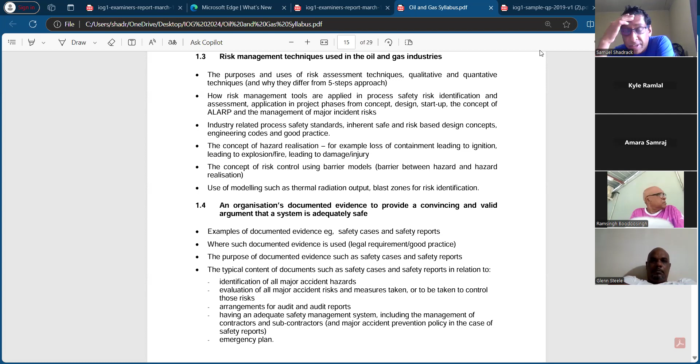What I had mentioned was that I think it was a bit short. Like those who did it, the writing style was a bit short. The verb they use for these exams, for the written exam, the most common verb is 'outline'. And outline carries with it about three sentences, maybe two or three, three to four lines. So if you write a point, even if they asked you to identify the root cause of the accident, and you say the root cause of the accident is management failure - that's just one line. So for many of us here who are open book students, you all did the exam in the open book era anyway, which is still going on.

But you might wonder, well, what else do you say? Because you don't have a case study, right? Remember, with these exams, it's just a flush question. So what else do you say? The answer is you can make up an example. You can probably just say 'for example', and that gives you the additional line. For example, if management failure is not identified and corrected, you can give an example - you can say managers may have the opinion that the accident is the fault of the worker. You make something up because the one line is not going to give you the mark anyway.

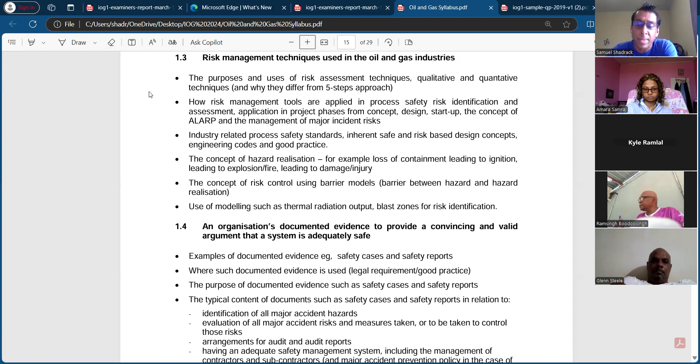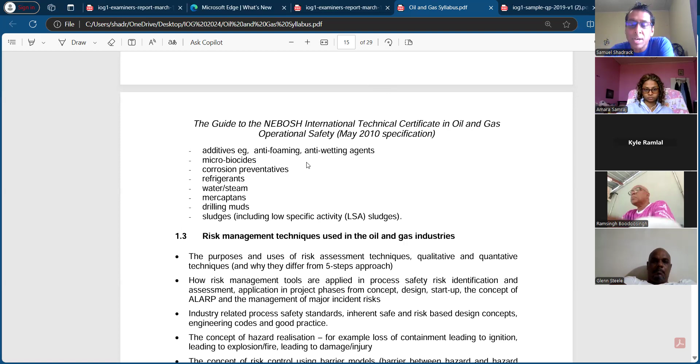So today we are on to 1.3. Again, I would want to congratulate all those who did the process safety course. I have some of you all here, and I think we got 89%, well, 90% passes. Two students did not pass the process safety, but the reason I'm mentioning it is because there are some common elements. And if you look at the syllabus, as I was telling you last week, you see process safety up there - process safety leadership.

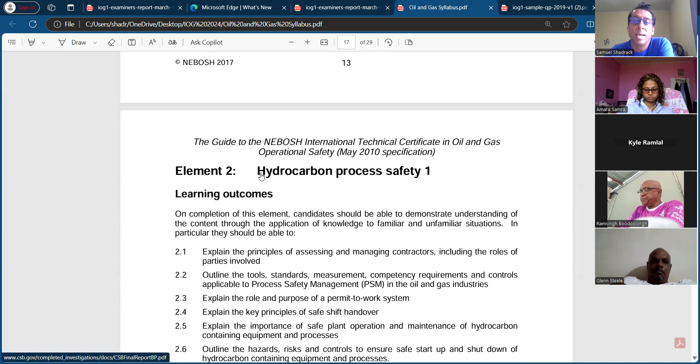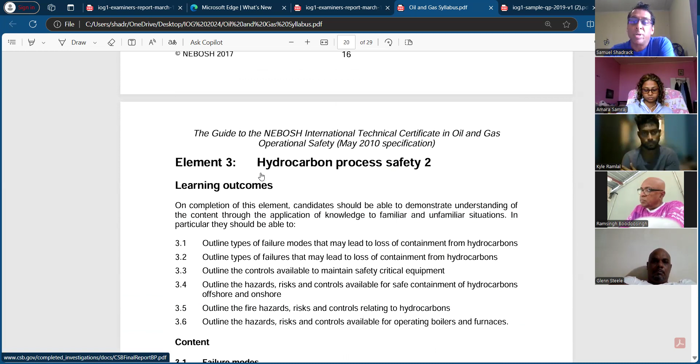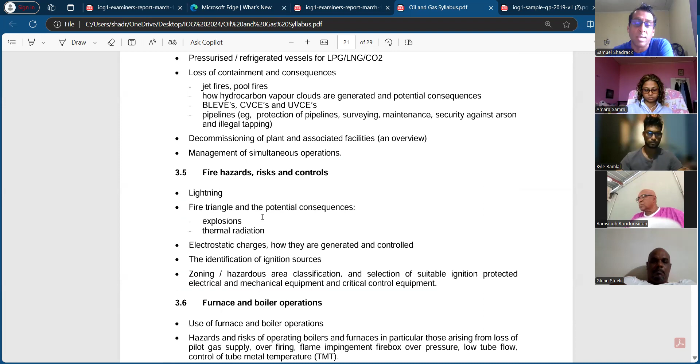So those who did the process safety course, it would have been a nice follow-up. Ideally, process safety was level 4 and oil and gas is level 5, so you see hydrocarbon process safety. Those who did the process course - if you didn't, we'll take it from scratch again - you would have seen things like BLEVEs and CVCEs and UVCEs, and even today's class. Today, to me, the whole class is like a process safety lesson. So that's good, and those who did that course would have had a little foundation going on.

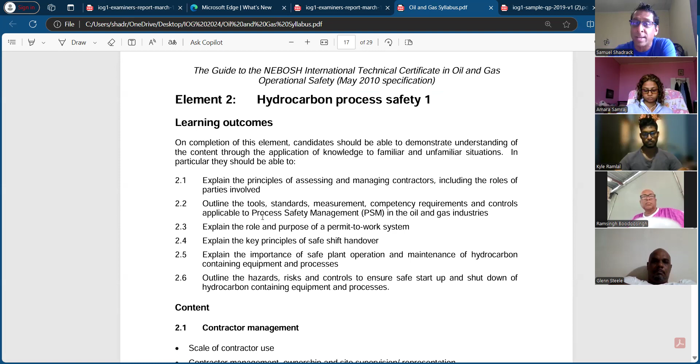Not to put down the process safety, but remember, process safety is multiple choice, so in a way it didn't have to really work - you had to study, but the answer was there, right there. It had to be one of the four answers because it's multiple choice. But oil and gas is level 5. It's some of the same thing, of course there's some more when it comes to oil and gas. But the lesson today, 1.3, is on risk management techniques, and that doesn't change - it doesn't even change for the degree.

So 1.3, I don't know if we're going to get into 1.4. I didn't plan to get into 1.4. The reason is that, unlike process safety, like if I'm teaching HAZOP, I have to make sure you all understand it because next thing they give you, you all want to do it.

Process safety, we'll just assume - well, we didn't assume, but we kind of just said you just had to know it as a multiple choice. You're not really required to produce or replicate a HAZOP or a bow tie. But in this course, you probably will have to because it's a written exam, right?

So just to read it out here, I'm going to touch a couple of them. Risk management techniques used in the oil and gas industries, the purpose and uses of risk assessment techniques, qualitative and quantitative techniques, and why they differ from the five-step approach. We will talk about that as well, right?

How risk management tools are applied in process safety, risk identification, assessment, application in project phases from concept design - and that's your HAZOP right there. When you say concept design, that's a HAZOP study, right? Startup, the concept of ALARP and the management of major incident risk. I don't know if you get into the concept of ALARP because the technique itself is kind of long, right?

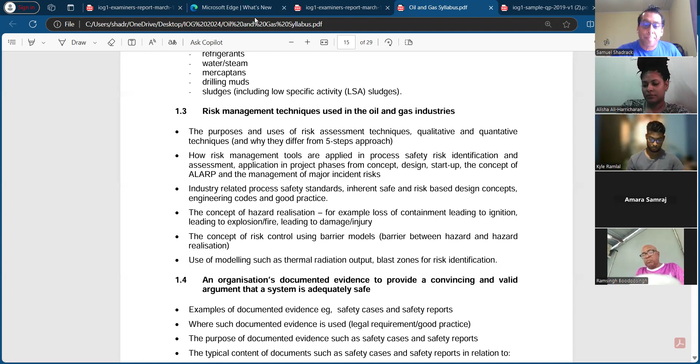We are on page 18, risk management techniques used in the oil and gas field. Let me just share the PowerPoint with you all - it's the same thing. Like I said, I would have to explain the techniques in such a way that you all kind of understand it, because unlike the PSM exam which is multiple choice - those of us with the book, page 18, you'd see the risk matrix, same thing. Those of us with the books see the same risk matrix. Many of you may be familiar with that kind of matrix anyway.

But to the top, if we go back - should we go forward or go back? To the top, even page 25, you'll see HAZOP. Look, I have HAZOP here, a HAZOP study, right? But this takes some time to explain - it's not to just read, you see, page 25, because unlike the process exam where they just ask what is the meaning of the term HAZOP, you may actually have to do one now, right?

So HAZOP is there. One of the main ones is your HAZOP. They even have HAZIDs, FMEA. HAZIDs is on here too. Look at right there, HAZIDs, right? So let's make a go at it. Those of us in the book, I just wanted to shout it out to you. If we can find page 25, HAZIDs is there, FMEA is there, right?

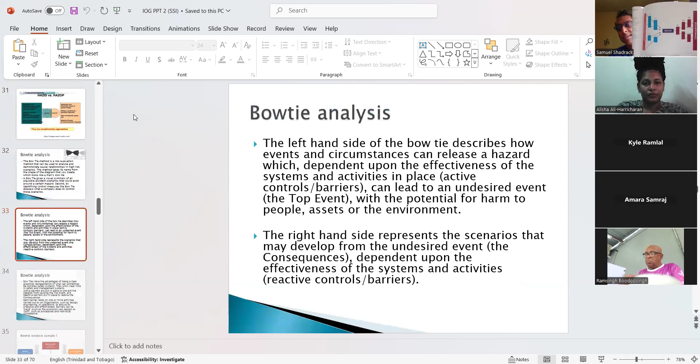I'm sure I'm seeing hazard realization, so definitely that's the bow tie. This is from your textbook, and this is mine on this slide. So it's the same thing, right? So that's going to make us start.

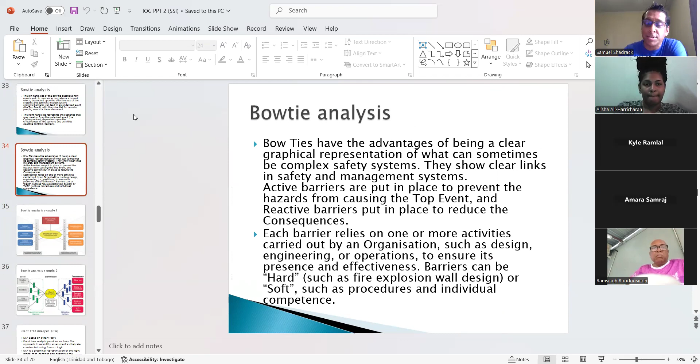But if you came from level 3 and did not do level four, like I said, you have to learn from scratch today. And there are even some people who did not do level three. So that's why it's not just a read, nice to explain, because remember, you have to kind of explain this to yourself and write it out for yourself anyway.

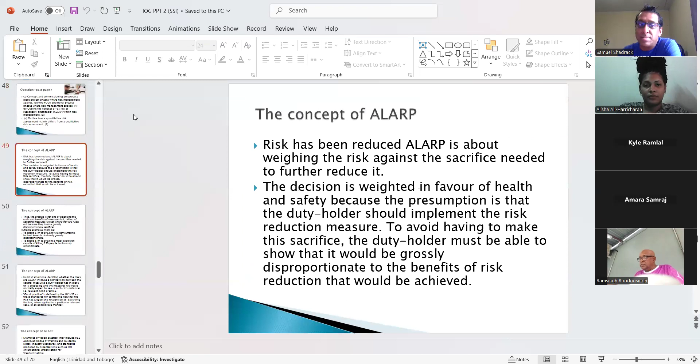So that's why I said I don't think we'll reach ALARP, as low as is reasonably practicable. But it's right here. Now that you have this slide, maybe you could read it out. But I don't think we read the ALARP slide 49, because it's not a reading exercise. It is what it is. It is a learning exercise.

So going all the way back to the top, welcome in, those who are here, level three students, level four students, let's have a go. So risk management techniques used in the oil and gas industry. The first part will go kind of fast because it's just to read.

So the main objective of risk assessments is to determine the measures required by the organization to comply with relevant health and safety legislation, and thereby reduce the level of occupational injuries and ill health. Its purpose is to help the employer or self-employed persons determine the measures required.

This is risk management, right? The measures required to comply with the Management of Health and Safety at Work Regulations 1999, Regulation 3. I may have to explain that.

Hopefully you all take notes. Today's such a hot day, I have the fan and the AC on. Actually, I took off the fan because it's making me cough. But yeah, those of us looking at this, I think Trinidad today is very, very hot, temperature getting up there to the 40s.

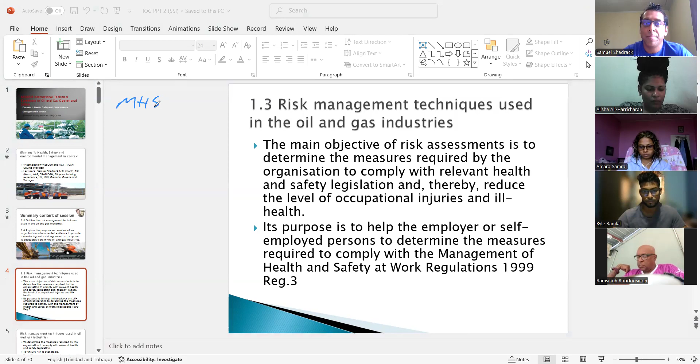For those who don't know, the UK has many laws, and this here is one of the laws in the UK. It's called the Management of Health and Safety at Work Regulations 1999, and you may want to commit that to memory because it's not a multiple choice exam. There's an acronym for it, I'll write it here for you: the Management of Health and Safety at Work Regulations 1999. You may want to learn that phrase.

You see why? You see what happened today? Today the topic is risk management techniques. But what you have to pick up if you read this is that the law is actually telling you to manage your risk. So risk management techniques, if you read this over again, its purpose is to help the employer or self-employed persons to comply. So why do all of these techniques we're going to learn just now, HAZOPs and HAZIDs?

Those of us who did processes, like a refresher, but you have to probably learn it a bit different now. But why bother do that? It's not just good management. The heading is risk management, but there is a law in England that actually says that.

So if you do manage your risk, you are compliant with the law, and in particular Regulation 3. Now, in the UK, like a part of a law, you know how we would say sections, like we would say section 2, but for regulations, a part of a regulation is also called regulations. So that's kind of strange, right?

So when you see Regulation 3 of the Management of Health and Safety at Work Regulations 1999, this means that this is like a section in that law. It doesn't mean a separate regulation, it's like a section of the regulation. But as I said, the terms are a bit funny.

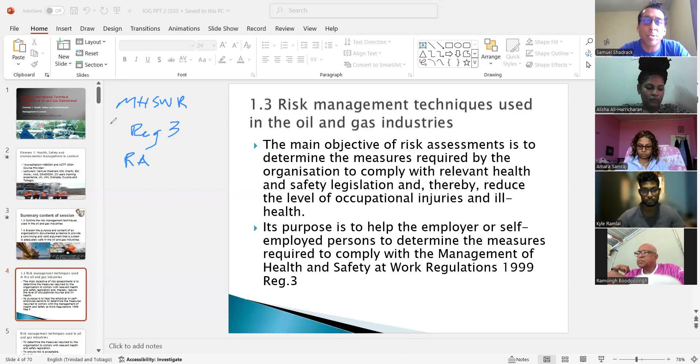So risk management techniques used in the oil and gas industry again. To determine the measures required by the organization to comply with relevant health and safety legislation, we've said that risk management techniques are there to ensure the risk is acceptable or low. It fulfills a moral duty of care to employees, to show them that you're caring about them in some way, these are called risk management techniques. If a hazard is analyzed and the risk of it is reduced, you would have a safer workplace, reduced accidents, etc. And if you reduce accidents, you reduce the direct and indirect costs associated with an accident.

So again, here comes the tricky part that you're going to have to be familiar with. Unlike, and this is kind of like a re-paradigm shift, which I don't think is a word, but a paradigm shift is a shift from the normal. This shift is going back to how exams were before the pandemic, where you had to learn that. So that's a nice question. Of course, with the current type of exam, it's like a 4 mark.

Somebody was outside. Did I admit them? Jeez, I did. I think I got it now, right?

Yeah, so with these exams, you had to be familiar with your notes. What we used to do, we used to print the notes. Well, I mean, students then print the notes and carry it with you. A lot of people, if you have your books, great. I often felt once I realized the notes was the book and the book was the notes, I often printed my notes. I sometimes still do.

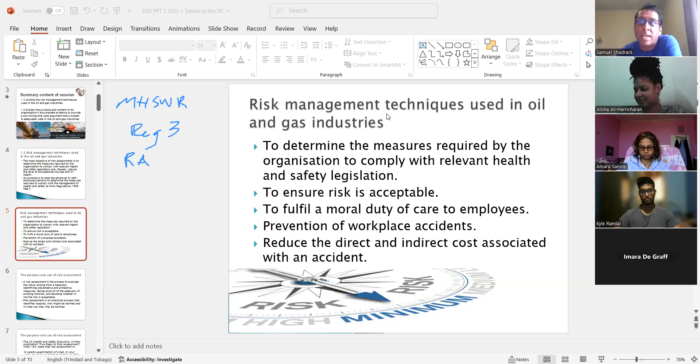But the only thing is, find some way to study. So that's what I'm trying to say. Download the video, whatever, if you're stuck in traffic you could listen to it, because you all have that sort of access now that we didn't have, before the pandemic anyway.

All right, the purpose of a risk assessment. A risk assessment is the process to evaluate the risk arising from a hazard, identifying preventative and protective measures, taking account of the adequacy of existing controls, and deciding whether or not the risk is acceptable. Risk assessment is an analytical process that identifies hazards, who might be harmed, and in what way they may be harmed. The purpose and use of a risk assessment is the heading again.

In the UK, the Health and Safety Executive, for anybody very new here, the Health and Safety Executive is OSHA, but they don't say OSHA in England, they say the HSE. So if you don't know that, take note of that. Wherever you see HSE, it doesn't really mean health, safety, and the environment in England. What it means is the Health and Safety Executive, and they are the main health and safety, or the main government health and safety body in the UK.

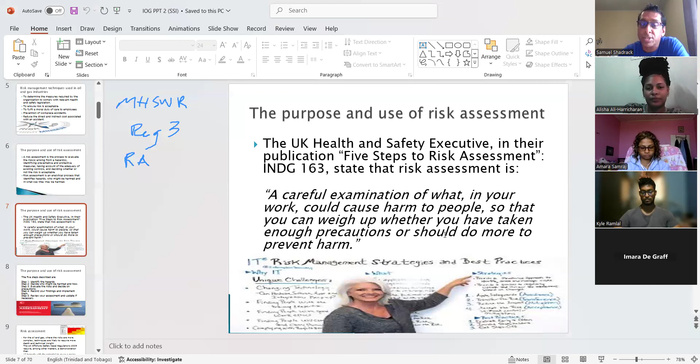So the UK Health and Safety Executive, in their publication, yes they produce books, Five Steps to Risk Assessment, code INDG 163, states that risk assessment is a careful examination of what in your work could cause harm to people, so that you can weigh up whether you have taken enough precautions, or you should do more to prevent harm. In most cases you have to do more, because no risk assessment is perfect. The five steps coming out of INDG are these steps. I would ask you all to learn them, those who don't know them as yet.

The five steps are: identify the hazard, decide who might be harmed and how, evaluate the risk and decide on precautions, record your findings, and review your risk assessment if necessary.

Because it's a written exam, I would say I don't see this question coming because this is actually level 3 right now. So to get into the oil and gas level, they'll ask you one of the oil and gas risk assessment methods. This is like a normal risk assessment model.

So how this is normally done, it's normally done on a table. You'll probably see one - not like a matrix, that's just a matrix anyway. But it's normally done like on a table, and then these words here become the columns of the table. So the first column is identify the hazard.

The second column is decide who could be harmed and how. Third column is evaluate the risk. And then the document itself becomes the record. And a risk assessment is reviewed every year - reviewed annually. In fact, the UK just said regularly, but most countries do it annually. So you review risk assessment on a yearly basis.

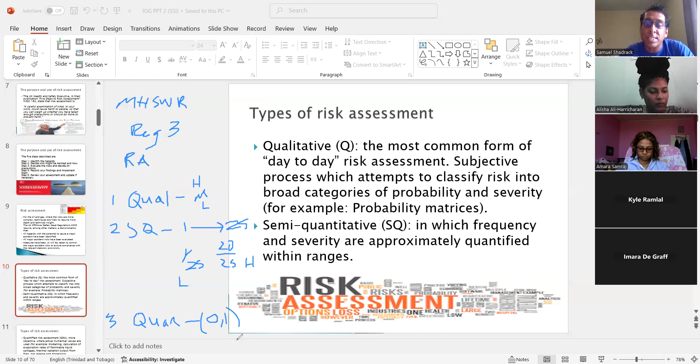QUAN, right? A quantitative risk assessment is one that uses, the best way to think of it, pure maths. What do we mean by pure maths? Another way of thinking about it is binary. In a quantitative risk assessment, they use numbers between 0 to 1. So the next question is, are there numbers between 0 to 1? Of course, endless, in fact infinity. So in a quantitative risk assessment, the number you may come up with may be 0.86.

Yeah, maybe 0.86. So it's a little different and it really doesn't have a meaning. It is really just a number, right? What it does represent is a probability of the event happening, but it doesn't represent high, medium, low. So if you notice with the quantitative risk assessment, you're not saying okay, I put high, I put low, I put medium, because it doesn't really carry a word meaning. What it represents is how likely it is an accident will happen, like 0.86.

There's actually a way to convert it, which is beyond this class, but we may get to it in another class. There's a way to convert that if you turn the decimal into a whole number, and you would see how likely it is you can have an accident. But it doesn't really represent high, medium, low. So that's why quantitative is said to be pure maths. It's just numbers alone, binary logic, they call it. Zeros and ones, like the movie Matrix.

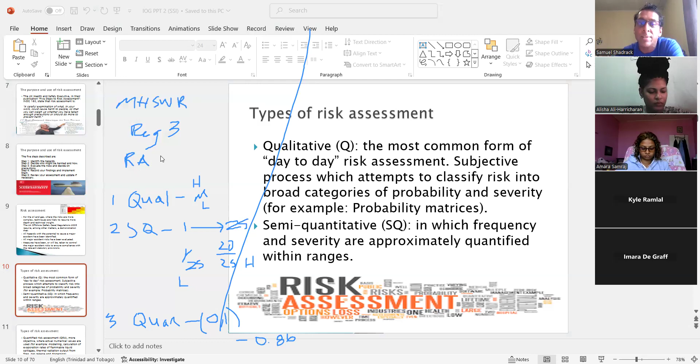If you remember the movie Matrix, when it started, you see a series of zeros and ones. So there is a whole set of numbers between 0 and 1, from all the decimal points. So those are the 3 types of risk assessment. Before I leave this though, because I didn't read the slide, I explained it, which is a way to go a bit faster. So you could have a read of it on your own.

Before we leave it, we have to say that in the oil and gas industry, they go from being subjective to being objective, if you look at the slide. So qualitative is like a very subjective risk assessment. Like when somebody's saying the risk of a fire from an oil spill is high, but that's kind of subjective. It might be subjective if it's a big oil spill, but the thing is, it's a bit subjective there. It isn't as accurate as a number. If you say the risk is 20, 20 is better than saying high. Because when you say how high, when you said it was high, what were you thinking about? Was it 16? Was it 20?

Like, what do you really mean by high? So if you go with the qualitative method, it's always subjective. And because of that, the more hazardous the work is, the more you need a better means of calculating it. So they say here, quantifiable risk assessments, like the one that uses numbers, are always more objective. You can get computer modeling and calculations to calculate the exact figure. How do you think they get that figure 0.86? Exactly, machines, calculators, computers that actually do that. So these approaches to risk assessment reflect a range of detail, ranging from the least detailed or least proven one to the best one, which is the quantitative risk assessment.

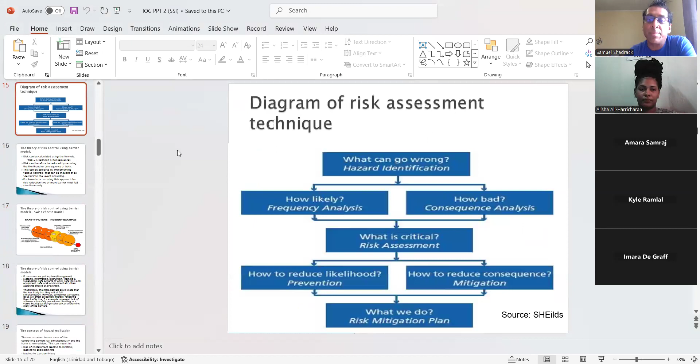So as I was saying, there's a formula for it, and we use numbers, like 1 to 5. The likelihood could have been 3, and the consequences could have been 5. You pick your numbers for how likely something would happen, then multiply it to get a reading out of 25. But to get into the advanced techniques, I don't know if you want us to go straight to the HAZOP. I think we can just go straight to the HAZOP if you want.

Let's introduce it a bit here. Well, all of this is the introduction to it, so I could take it from here. Actually, let me take it back. I saw hazard realization in your syllabus, and there is a theory for this.

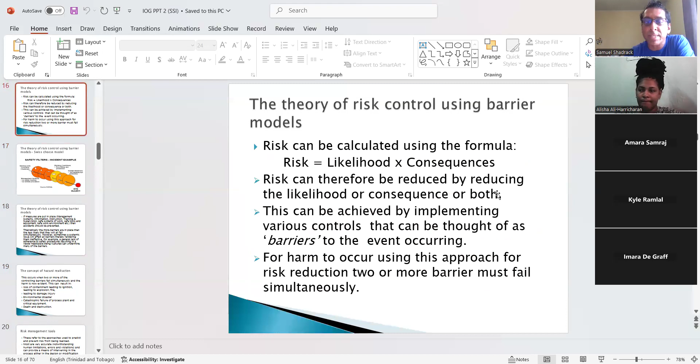The man that came up with this, his name is actually Reason, and he produced something called the Swiss cheese model. The idea behind this is that for an accident to happen, a lot of things have to go wrong at the same time.

Now again, that could still go on and there'll be no accident. That doesn't mean you'll get chemicals in your eye. People sometimes work with chemicals all the time without gloves, without eye protection.

But if the person's human behavior was probably not being careful, and some of it spilled or splashed, that could be the reason. So a lot of things have to go wrong at the same time.

And of course, in the UK they have these, like pepper jack cheese and stuff, that I suppose he would have drawn this model over, where the hole in the cheese represents something that would have failed, like the worker wasn't using his goggles at the same time.

Probably nobody was supervising at the same time, it wasn't fitting properly at the same time. Maybe he used an inappropriate container in decanting it. Maybe he didn't have a glove, and that's when some went on his hand, and he probably put his hand up and some went in his eye.

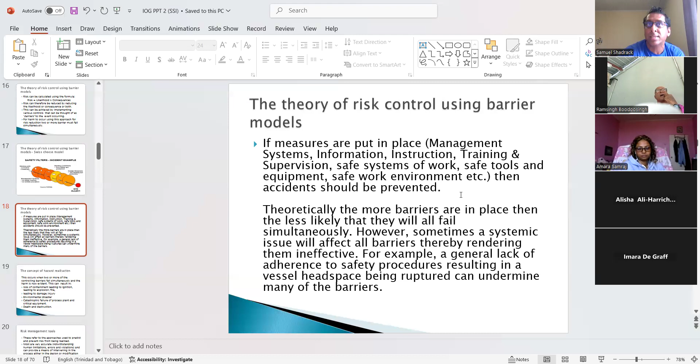Theoretically, the more barriers are in place, the less likely they will fail. Simultaneously, however, sometimes a systemic issue can affect all barriers, rendering them all ineffective. For example, a general lack of adherence to safety procedures resulting in a vessel headspace being ruptured could undermine many other barriers. So there's a tank example, something happened in a tank, and you probably had other barriers that would have been okay, they work as a train, but what if you have a fire, a massive tank fire? Or you have a bund. But how much can the bund hold if you have a fire? A bund can't do nothing for a fire.

So sometimes if these things go kind of haywire in the oil and gas industry, one barrier fails, then because of the failure of one barrier, the failure to have a proper permit to work, it resulted in a lot of other things escalating. The lack of isolation - all of those things are barriers that should have prevented that accident with the divers. But when you open an isolation valve which is not supposed to be opened, that's why it's called isolate - those of us who know, in a permit to work, isolation means lock off and prevent it from being turned back on. It doesn't just mean lock off alone, it means prevent it from being turned back on. So how could somebody open the adjacent valve to create the suction in the line? So sometimes when things go wrong, it doesn't matter how trained you are, how many years experience you have, how much air tank you have, the whole damn thing goes down because of that failure anyway.

All right, let's go to this one, setting up the idea of the HAZOP. I'll read out these two here. So risk management tools, HAZOP is probably, I think, one of the main ones. I do want to finish that one and probably one other one today.

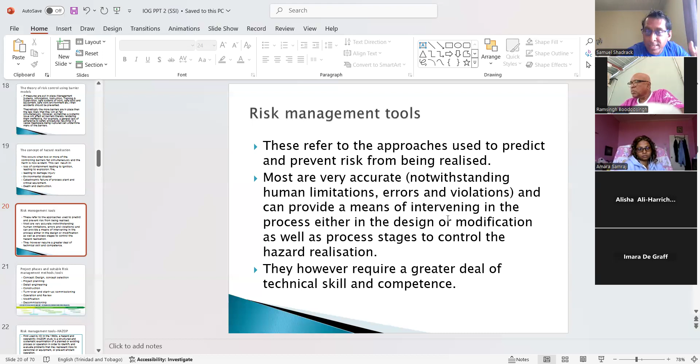So these refer to the approaches used to predict and prevent risk from being realized. Most are very accurate, notwithstanding human limitations, errors, and violations, and can provide a means of intervening in the process, either in the design or modification stage, and that was on the syllabus, as well as process stages to control the hazard realization. They, however, require a greater deal of technical skill and competence than your normal risk evaluation.

And we're going to do one just now, I think this is straight from your syllabus - project phases and suitable risk management method tools. They talk about what technique should be used in the concept, the design, the concept selection stage. Like, what technique to analyze the risk - are we going to use the 5x5 matrix to analyze the risk in the design stage? We could. Are we going to use some of the other tools you saw, like the ETA, in the design stage? So this is what they're trying to say: there are different techniques.

Project phases and suitable risk management methods - so which method aligns itself to the different stages of the project? Off the top, I'll tell you, HAZOP is design. Project planning might not be HAZOP. Detail engineering, construction, probably a normal risk assessment. Turnover and startup commissioning, that could be a HAZOP too. Operation and review, modification is a HAZOP. Decommissioning can probably be something like an ETA. I don't think they're going to ask you to match up these things. The point I was trying to suggest here is that we are looking at advanced techniques, and the advanced techniques can be suitable for different phases of your project, at least as it's on the syllabus.

So different techniques then would be best at certain stages of a project. So the best one I'll tell you, or at least the one to start with, is something called the HAZOP. I'll read and then I will stop reading and explain as well, but I want to read one or two slides.

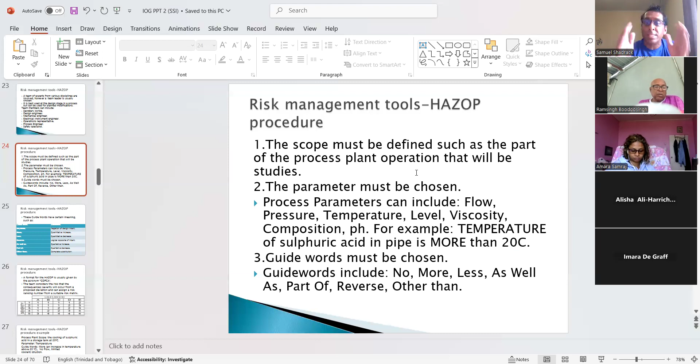This orange juice, for those of us in Trinidad or Caribbean, cool or whatever, it's not tasting how it is. It's bad. And of course the company would not allow that. They wouldn't allow a defective product to leave their supply, because once the reputation goes out there that, look, orange juice too acidic or whatever have you, then nobody will want to buy it. You have that population kind of outcry. So the outcome of that is product wastage in the manufacturing industry for something as simple as the temperature going above 20 degrees Celsius. If it was meant to be at 20, it can't be more, it can't be less.

All right, so what I was saying, here comes the main thing. The main thing is that a HAZOP has a format. So I need you to write it out for me. What I did here, I put the acronym here. I'm going to write it out for you. I put the acronym here: GDPCA, is the acronym.

And what those things represent, they represent the heading on the table. Remember, HAZOP is a risk assessment. Let's grab a marker. HAZOP is a risk assessment, so it's going to have a table format. Looking at the space I have, I wouldn't be able to fit all of it here, but I'll start to. If you have some space, you can fit them out. Or maybe I want to fit it horizontal because it's meant to be horizontal. Maybe I could start up here.

So the G stands for, you can figure that one out. The G stands for the guide word, which is the code that you're using. I'll just put guide. The G stands for the guide words. And in a normal risk assessment, you're supposed to start with the hazard, but here you're starting with the guide word. So let's just say more. I'll put, more. I'll say it again: in a normal risk assessment you start with the hazard, but not here, you start with the guide word. The other word here is the D, which stands for deviation.

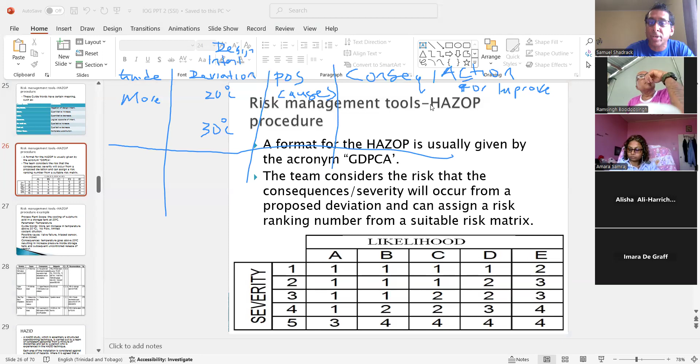Each of those would have been separated, and if you want to do less, you can do less here. What if the temperature goes down? What if we take another guideword other than that? Other than means it has something else in your drink—if this was a soft drink, it has something else in it. What if a customer finds a fly in the drink? What if they find a knife in a bag of oats in PriceSmart? What if that's actually a true one, right?

So anyway, training and supervision, very good here. Amara, also have risk by likelihood, right? Very good here. Okay, all right, let me take all of that off. I have a visual of one.

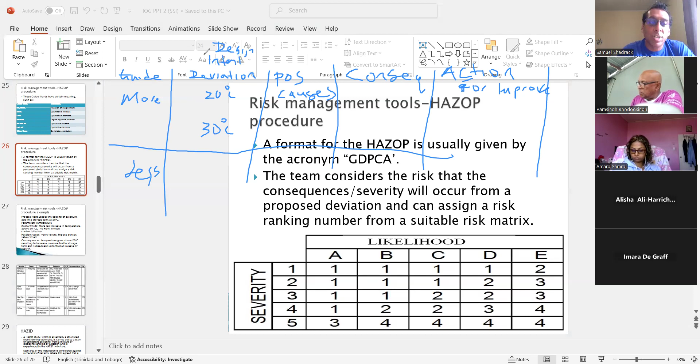Trying to see—I told you all, if more of you had come by to collect your book, I would have made more reference to the textbook. I'm kind of using it. Once I know you have it, I'll use it, right? So you know...

HAZOPs, page 25—they didn't do much. They have the same table, but they didn't give the format of it. They said the same thing: first used by ICI in 1960, if you feel I made up my notes. But do you know my notes were written before the textbook? I think we all kind of researched the same place, you see. It doesn't matter the book, it matters where the research came from. So if the book says ICI in 1960, I said the same thing, but I said it before it even had a textbook, right?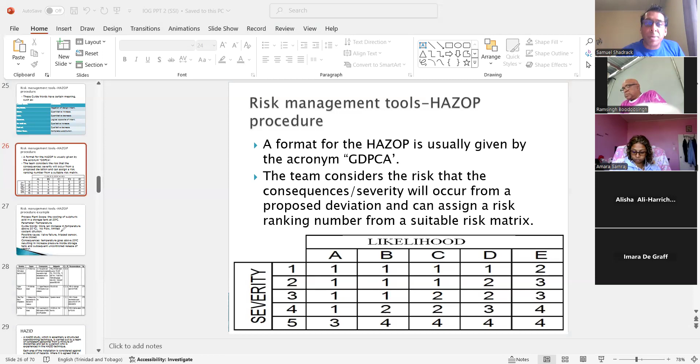All right, the book didn't seem to stress the format of the table, right? Nor did they produce one for you. That doesn't mean, since we're teaching it, we can't produce one for you—they could have had one here, right? This is, well, in this case they didn't start a guide, but this is like a company one. This is not a textbook one, this is one for a company.

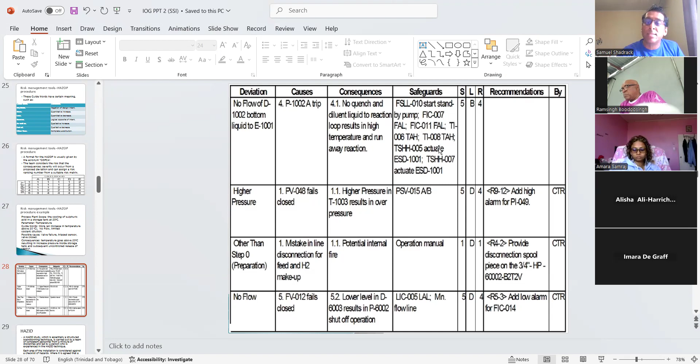Deviation, causes, consequences—they actually worked out the risk here, and then they have safeguards. The safeguards would be the controls or the action for improvement. The next one in your book, on page 25, is actually HAZID. So if you want, we could go straight to HAZID. It's not long, HAZID is very short. If you watch your book, two paragraphs they have on it.

We can go to HAZID, and we could even touch FMEA too if you want. We could wrap up this here on page 125, right? For those who don't see what I'm seeing, that's what we see, right? That's a short paragraph on HAZID—that's it right there. And the next thing is FMEA, right? The slides normally have more, but that's because we wanted to learn the thing and not just understand it, right? Not just to see it now, but to understand it.

Let me tell you how easy a HAZID is. I guess I'll read this slide and then explain it. So a HAZID study, which actually stands for hazard identification, is essentially a structured brainstorming technique carried out by a team of competent personnel from a mixture of disciplines and led by a person experienced in the HAZID technique. Just remember, this is not a HAZOP, right?

Each area of the installation is considered against a checklist of hazards. Where it is agreed that the hazard exists in a particular area, the risk presented by that hazard is considered, and all possible means of either eliminating the hazard or controlling the risk, and/or the necessity for further studies, are noted on the HAZID worksheet.

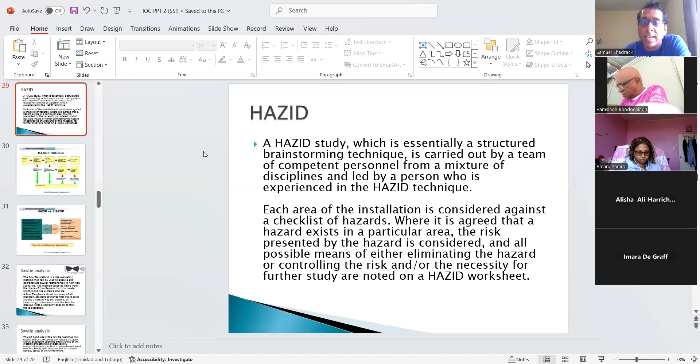So you understand a HAZID is not a HAZOP in short - a HAZOP uses codes like 'more' and 'less' and stuff. But a HAZID is like you are just going with a prefabricated sheet that a team would have done as to what hazards are on the plant, and daily you are checking that out. Hence they say, for each area of the installation, it is considered against a checklist of hazards. Can't get easier than that, right?

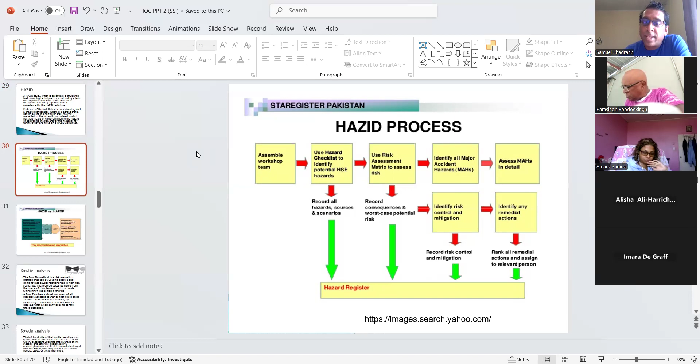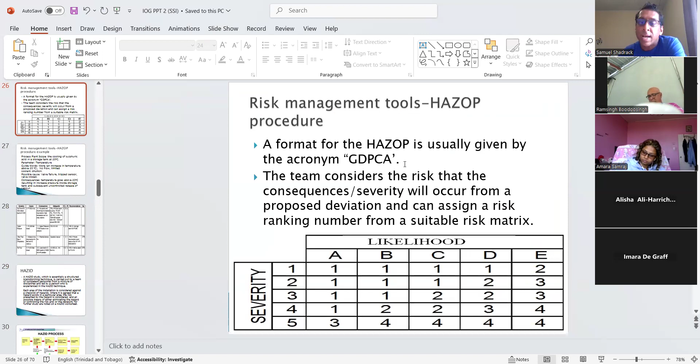And it may require what is called a P and ID diagram - people say it fast so it sounds like P and ID, but it's process and instrumentation diagram. You may need a diagram to see, in a HAZOP, where the acid is going and mixing with the water - you need to see that. But in the HAZID, you don't need that because the hazard is there for you: do you have noise, yes or no? That's how simple it is. I mean it's more complicated than that, but that's the simplest way to say it - do you have noise, yes or no? And because you have a checklist, you don't really need any more diagrams anyway.

It's best to look at one, right? I mean, it don't make sense to run down everything and then we ignore the question.

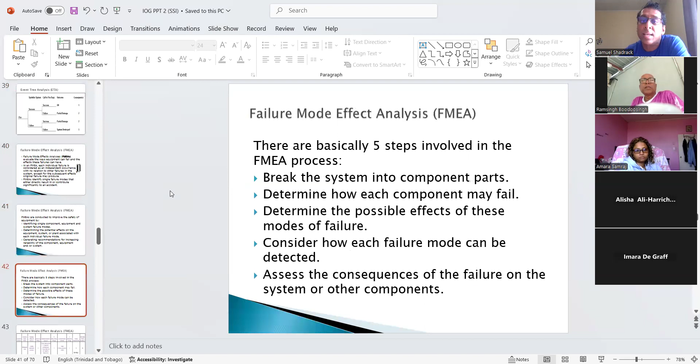Let me go down. I guess we're not getting to do bow tie. You see, this isn't a reading exercise. The most difficult thing with these courses is the process - if we could read faster, because it's multiple choice, but here you have to slow down, right?

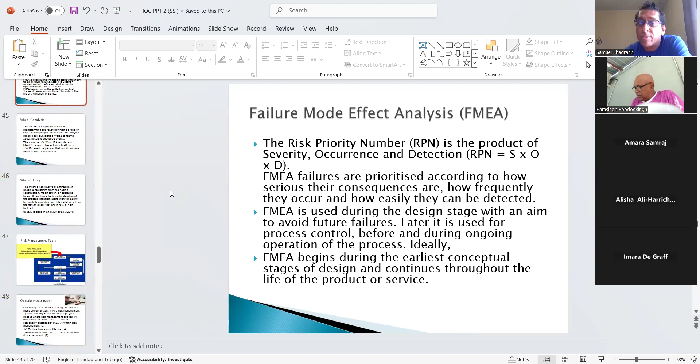Okay, so you want to give this a try as well? This will be your work for this week. The stages of the project phase was right on this slide. I just have to go back. I was actually matching it for you, and I'm matching it again just now for you, just to find the slide it was on.

So then that means if something is the subject of a past paper, remember what the trick is with NEBOSH - NEBOSH have a trick or treat. The trick is if you could figure them out, you get a question that you're already familiar with for the exam. They have a high amount of repeats, right?

But to me, even if it wasn't repeated, it kind of shows you what the focus is on. Remember I was focusing on how they matched up the techniques to the phases. But here we see a paper just asking you what are the phases, right? I was saying HAZOP for concept design and whatever, but they just asking the phases.

So then try to learn 4. Some of them are easy, watch it. Commissioning, decommissioning - that's 2 one time, right? Construction - you can't forget that one. Modification - that's 4.

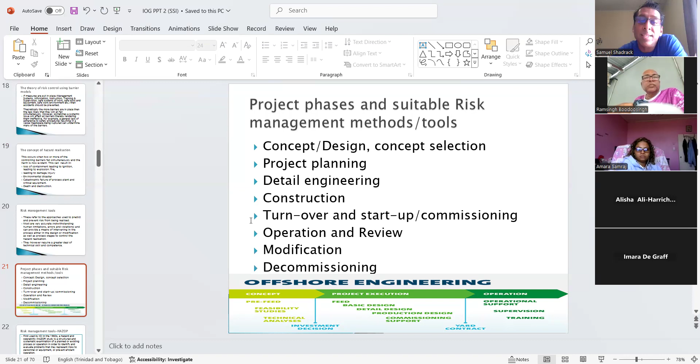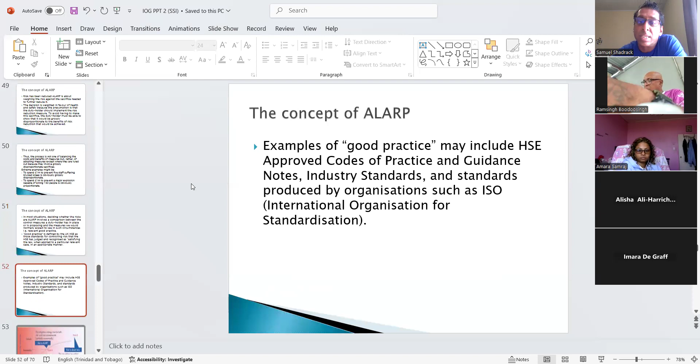If you read this out, you'll see it, right? Hopefully you can see it somewhere here, right? As low as reasonably practicable means you're spending to reduce the risk. You're spending a good bit, but you're not spending all you have, right? But you're not going down to finish your pocket.

You're just making sure, okay, look, we had a budget for a rescue team, we had a budget for hiring a fire watch or some fire watch. You're spending there, you're going as low - when I say hurt your pocket, I didn't say hurt you, hurt your pocket, right? Watch it.

What they say, watch it here for me. As low as is reasonably practicable, seems to be what? It is seen to be a moderate cost. It's seen to be, that's what they say, reasonable - as low as is reasonable.

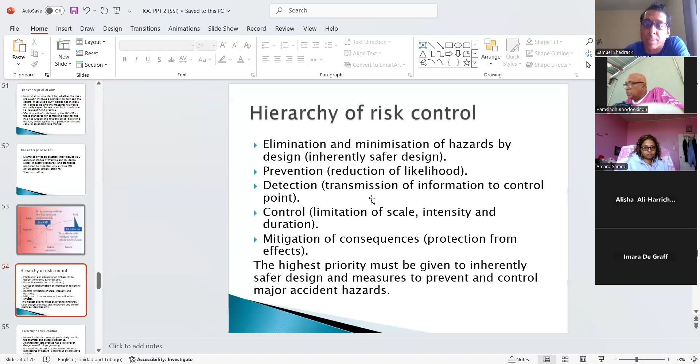But you're not going to finish all the money you have in the bank because it'll be too expensive. But you are spending reasonably, but you're still going further than you'd normally go now. That's as low as is reasonably practicable, right? I was saying, watch this, right?

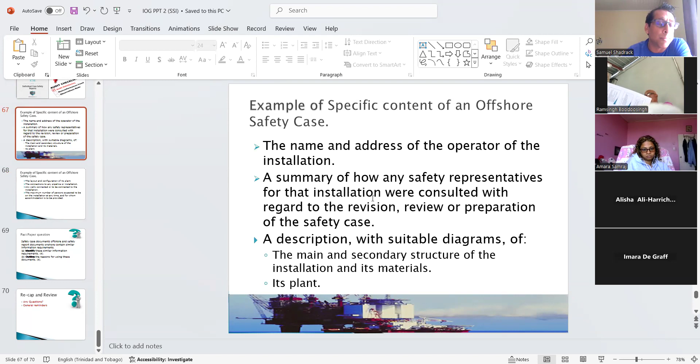Sorry, the HAZID - those are documents. You don't have to wait till I reach it to get the documents in, right? Outline safety case documents, offshore and safety report documents onshore contain similar information requirements. Identify these similar information requirements.

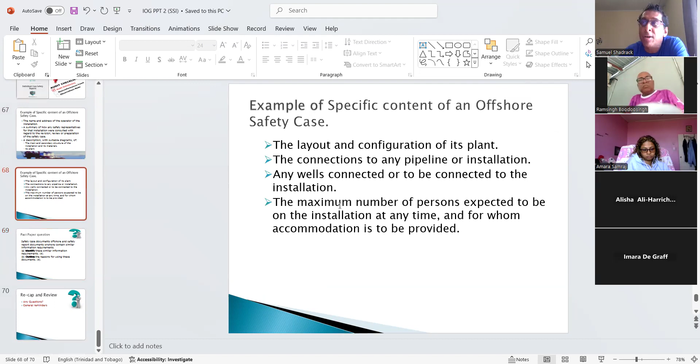One of them is what is the risk, right? I saw another passage, but just asking like to identify four documents used in the oil and gas industry. You already did something - of course there's more here, but you could say HAZOP. The fact that you learned something today, you can say it, right?

And a HAZOP, let's not forget what it is - it is a risk assessment. So if this is an advanced technique used in the oil and gas industry, what does it capture? It captures the risk, right?

Okay, we have to stop, right? Because I actually have another class too. I'm gonna stop here - I didn't quite get where I wanted to, but that's because we stopped and we...